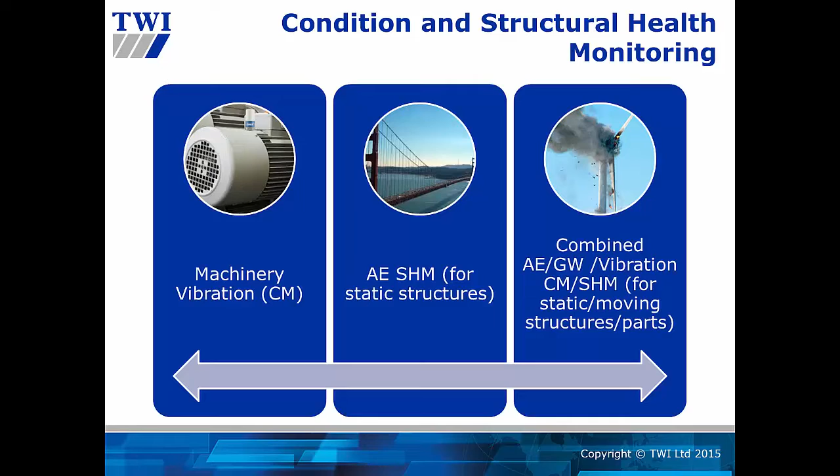CSM Advanced Technology Readiness through R&D projects covers the market needs and provides enabling technologies including hardware, software and cost-effective monitoring strategies.

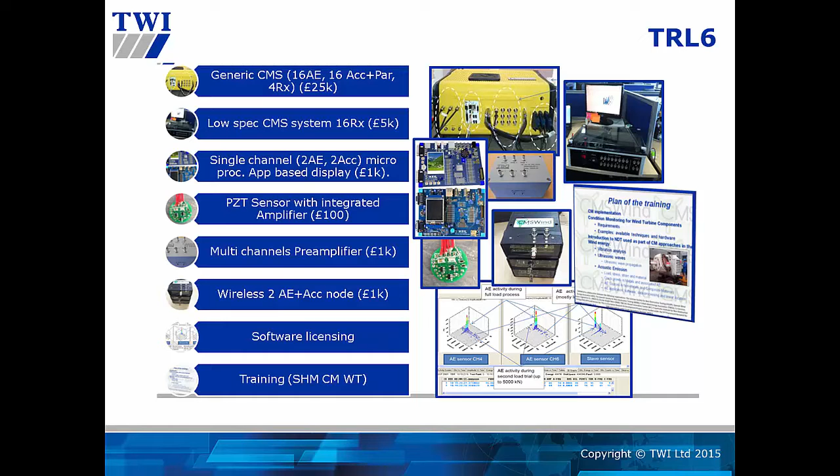Generic data acquisition systems, including wireless single channel designed for acoustic emission and vibration analysis, were developed. Consumables such as preamplifiers and sensors are also available. CSM can deliver bespoke systems and trainings for specific use based on the industry requirements.

As part of the CMS Wind project, CSM developed an advanced condition monitoring system for wind turbines based on vibration, acoustic emission and motor current signature analysis.

CMS Wind incorporated three different techniques simultaneously in order to fuse the process results and provide correct condition-based maintenance related information on the wind turbine machinery. The methodology was tested in a Vestas V90 wind turbine.

An automated baseline can be built out of the wind turbine operation, which makes it specific to the environment and operational conditions. The monitoring stage will then refer to this baseline in order to define the safe operation range. The entire process takes account of the wind and speed variability.

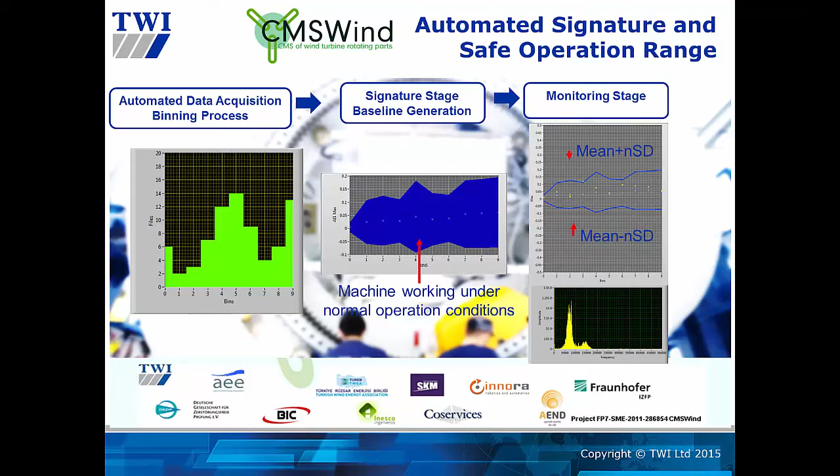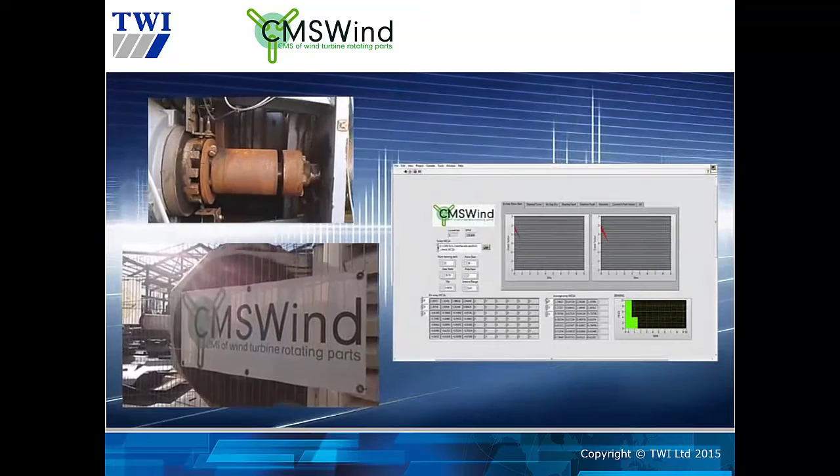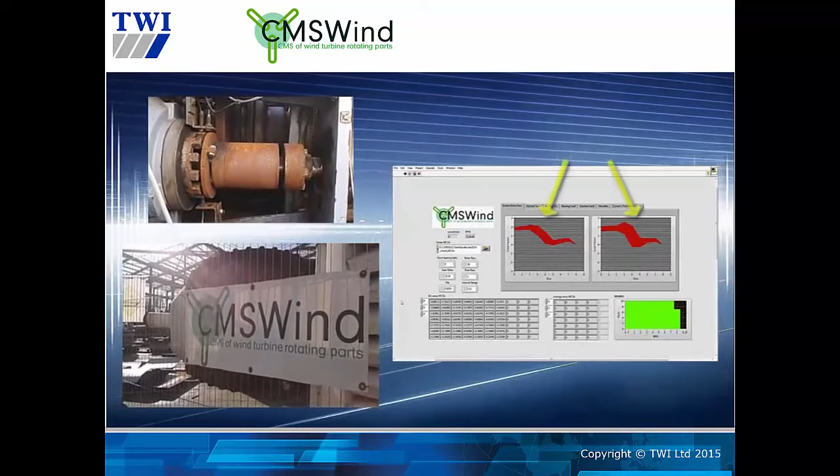Initial tests have taken place where the Windmaster 300 has been set up to run at different speeds, from 0 to 1500 RPM. Ten bins depending on the speed are defined, e.g. from 0 to 150 RPM, from 300 RPM to 450 RPM, etc., where gathered data is allocated per bin.

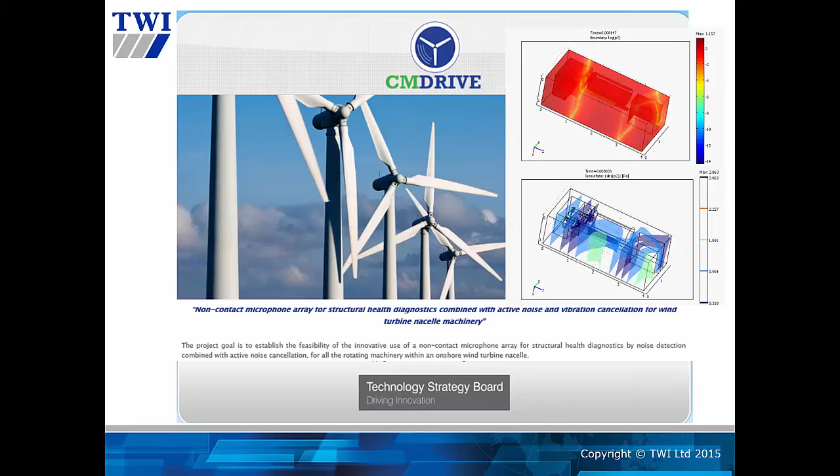The CM Drive project aims to establish the feasibility of the innovative use of non-contact microphone arrays for structural health diagnostics by detecting noise. The use of active noise and vibration control in order to cancel machinery noise has been investigated during this project. The CM Drive system relies on an array of non-intrusive microphones covering the audible frequency range.

The acquired data was able to inform about the acoustic signature of the healthy machinery. The noise levels change depending on the torque and the wind speed, hence the signature is defined by torque intervals. The binning procedure allows the identification of the acoustic signature with variable speed. It was proven that the system is sensitive to deviations from the healthy state of the machinery.

Within the same industrial sector, TWI developed a system and strategy for wind turbine blade monitoring. This can prevent catastrophic failure, such as blades falling from the wind turbine hub. The system is based on acoustic emission crack detection.

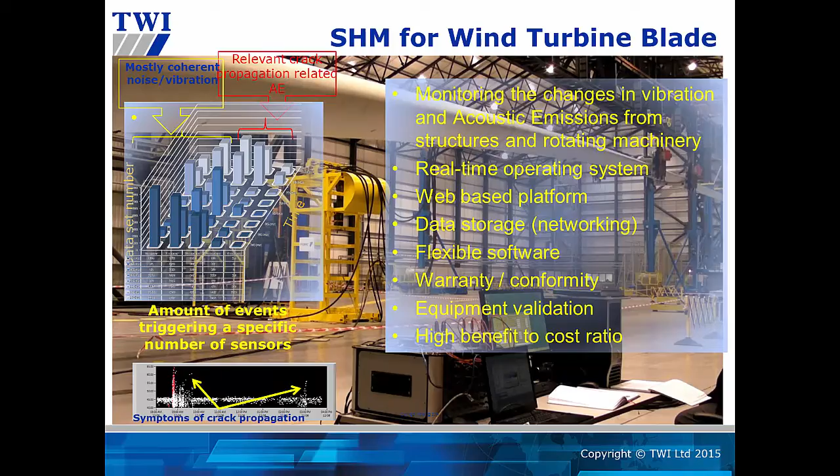It was validated on a blade fatigue test where initial cracking was embedded. A network of acoustic emission sensors was installed in a 45-metre long wind turbine blade in conjunction with a custom developed hardware and software platform for the data acquisition and remote health monitoring.

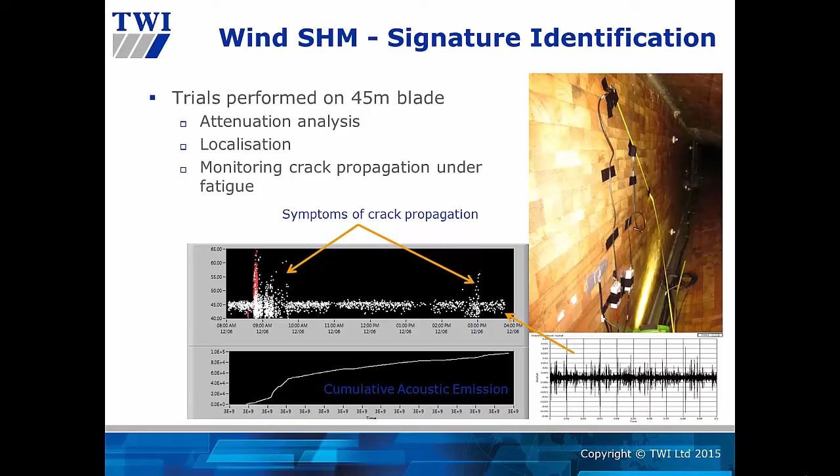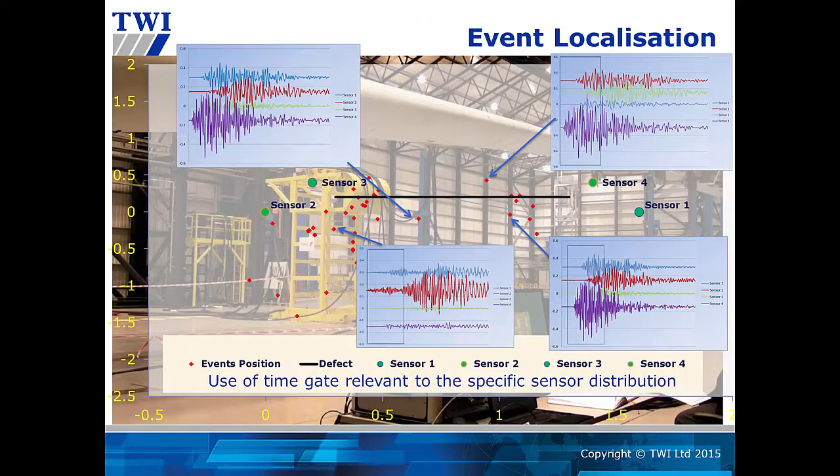The events representing acoustic emission from crack initiation and propagation became embedded in coherent noise. The investigation of the meaningful data related to the health monitoring represented a big challenge. The software strategy was successful in isolating the events needed and discriminating the unwanted events.

The DeICE-UT project aims to de-ice and prevent wind turbine blade icing during operation for wind farms located at extreme weather conditions, in order to improve operational conditions, efficiency in power generation and safety.

In order to achieve the objectives, a methodology including low-frequency vibrations and guided waves was developed. The system can identify the modes and operate at specific frequency in order to break the cohesion between the blade surface and the ice layer.

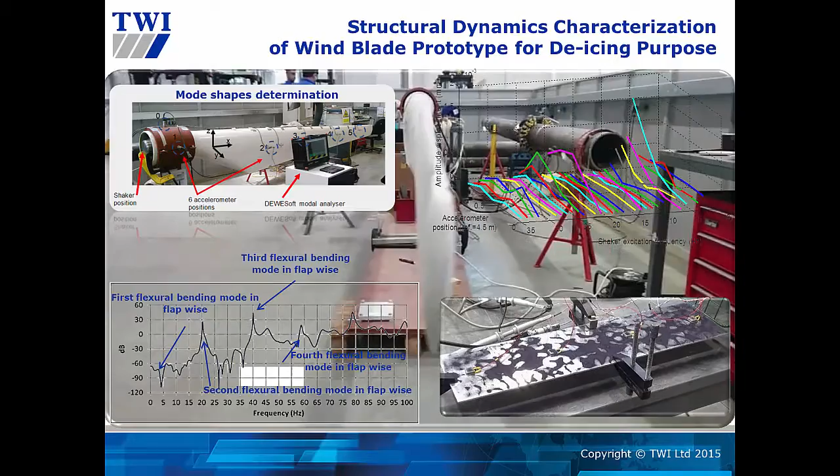Low-frequency ultrasonics was introduced as an anti-icing methodology, which can prevent ice formation on the leading edge of the wind turbine blade, which is the most critical area for the efficiency of power generation.

REMO is a project which aims to enhance the performance of tidal stream generators.

The aim of this programme is to advance technology allowing for condition monitoring of tidal generators. The REMO system is composed of 3 slots for data acquisition.

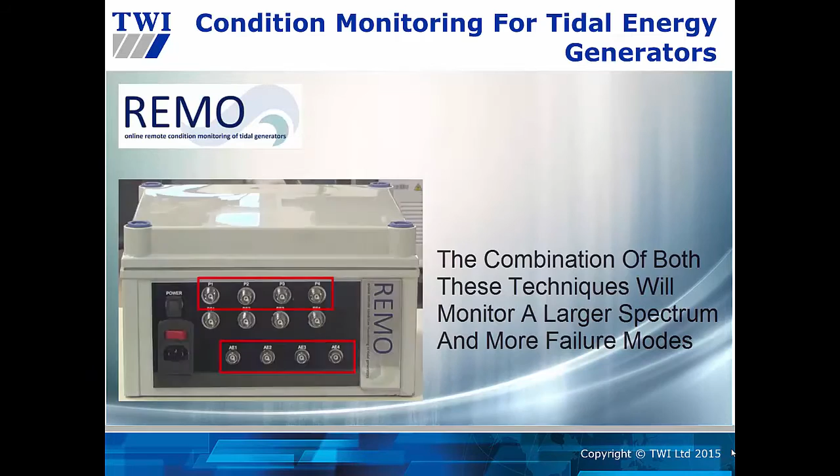The system has the capability of remotely and permanently monitoring the entire frequency spectrum of structural vibrations generated by all rotating components of a tidal stream turbine by combining a suite of accelerometer and acoustic emission sensors for the low and high frequency regime respectively.

The software continuously stores and analyses data while graphically displaying useful information for the operator. The data is transmitted wirelessly from the REMO system to the tablet for storage and analysis.

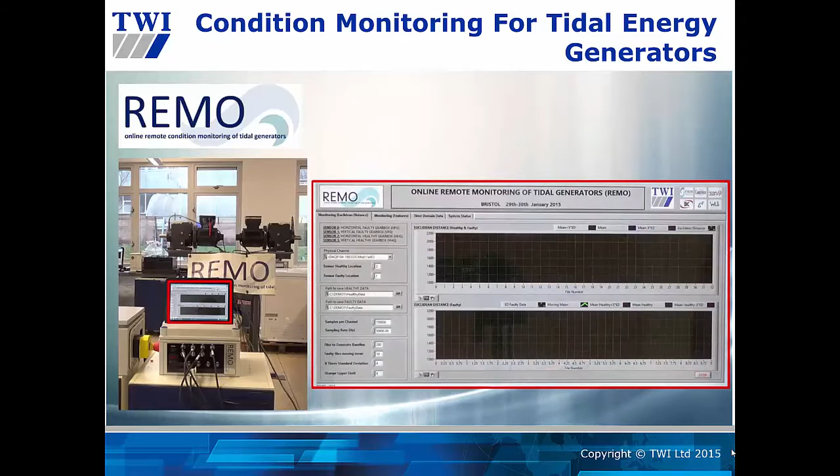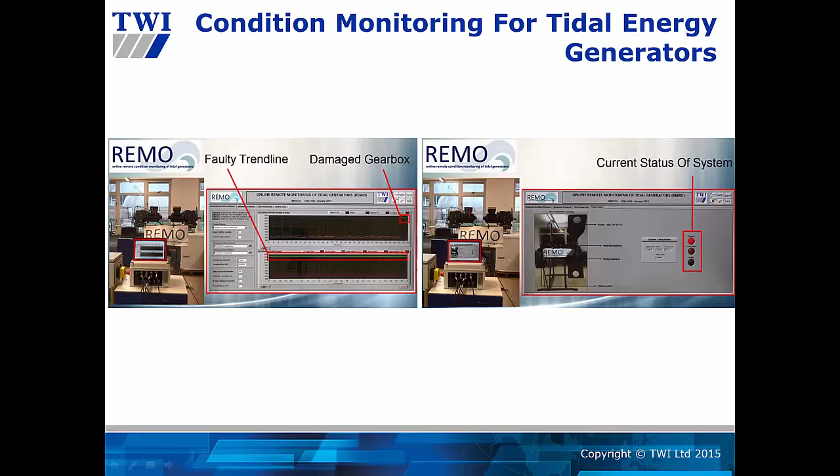Advanced signal processing algorithms have been implemented in the software in order to identify the machinery status. The system can be accessed remotely and the operator can identify advanced warnings. A set of short and long-time laboratory experiments were performed in order to validate the algorithms.

PIGWaves project, funded by the 7th Framework Programme, addressed the need to develop an internal inspection tool for in-service inspection of unpiggable pipelines using long-range ultrasonics.

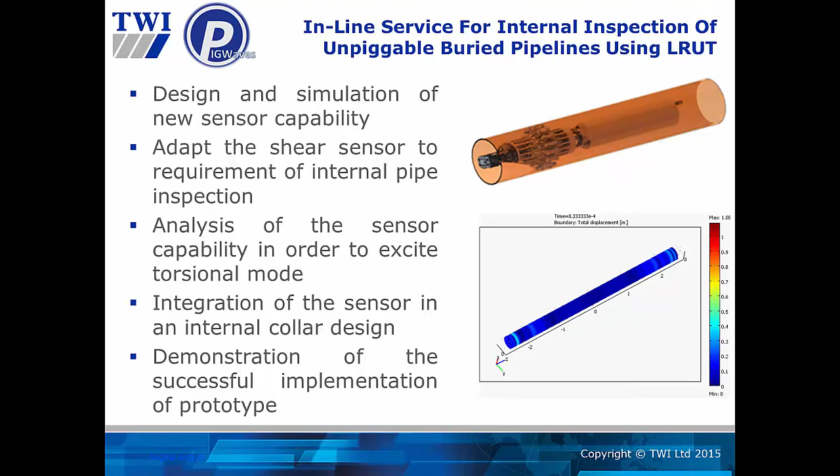Experimentation and advanced full design simulation of a uniform in-plane transducer and guided waves propagation was developed. Sensor design was performed analysing different strategies since the excitation was applied to piezoelectric material in different manners. Excitation along the width with higher level of displacement amplitude was obtained.

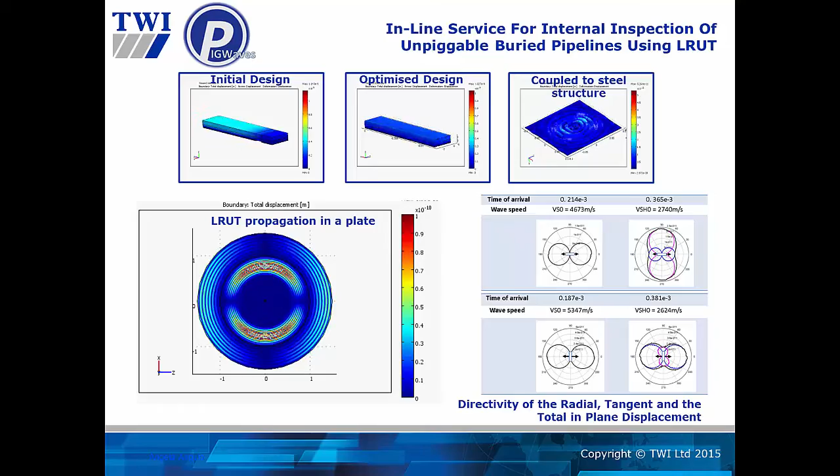An expandable internal array of long-range ultrasonic probes have been developed. Corrosion defects with thinning greater than 10% of wall thickness are detected.

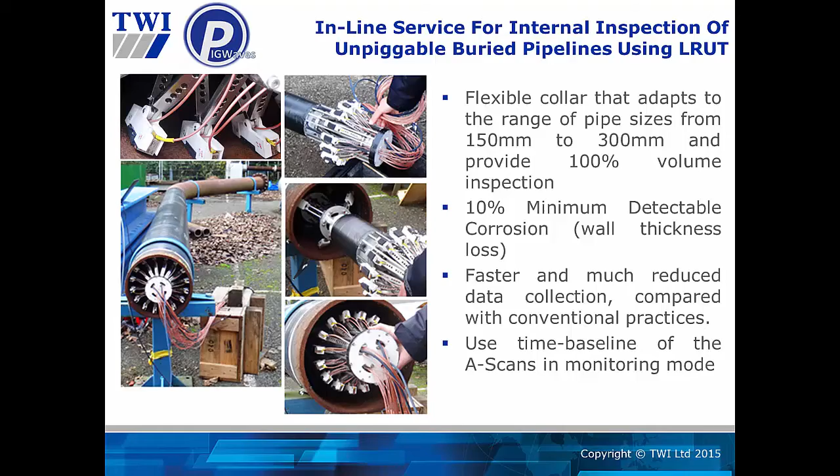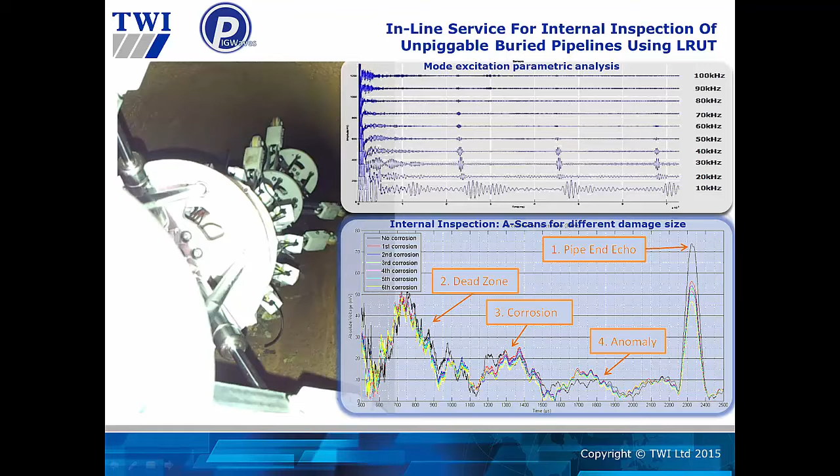PIGWaves reduce data storage time with greater inspection speed and quicker availability of the inspection results after the robot is recovered. Indication of different types of damage due to changes in received signal amplitude of the A scans compared to the time baseline is key in the data analysis.

SubCTest is demonstrating the use of remotely operated vehicles in the assessment of subsea structures by deploying inspection and monitoring techniques such as ultrasonic guided waves and alternating current field measurement. The project aims to build an exploitation strategy in the oil platform sector with a complete market analysis.

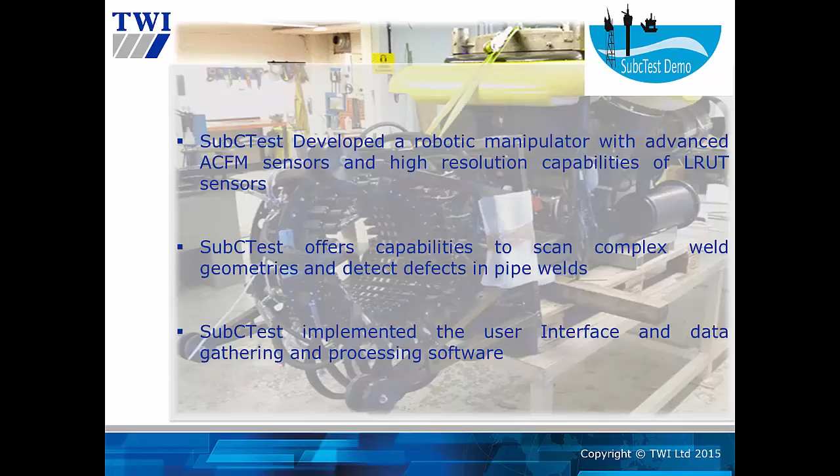The Subsea Inspection Collar can deploy LRUT and EMAT sensors. LRUT can locate the position of defect, such as corrosion, whereas the EMAT can characterise cracks.

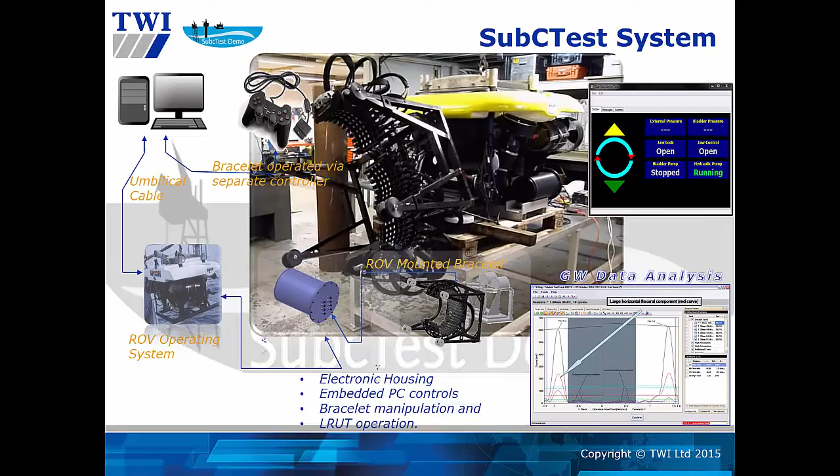CSM has supported the SOIMON Consortium through the implementation of enabling technology that helps assess the impact of oil and gas activities on the environment.

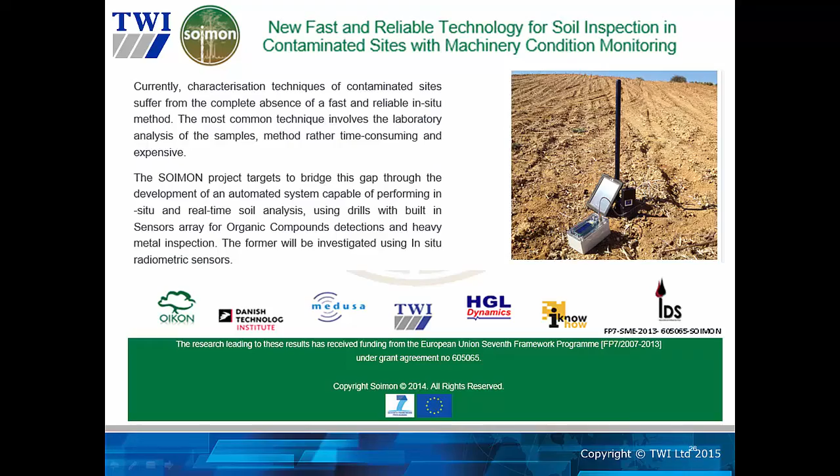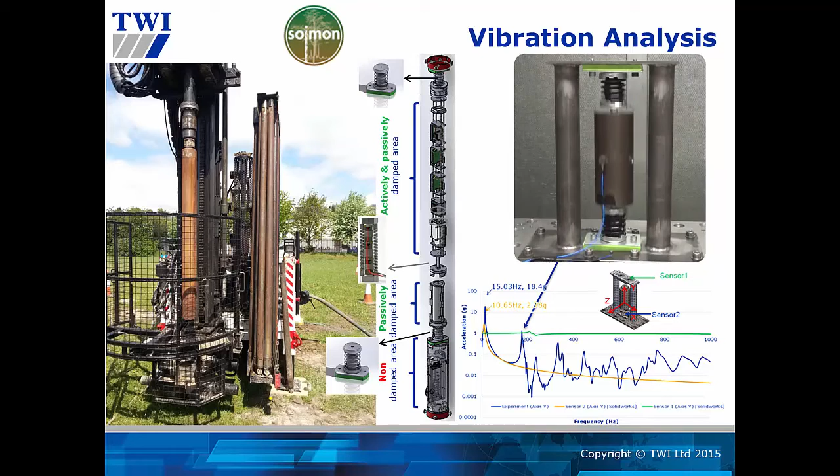SOIMON is incorporated into sonic drilling bore pipes and offers hardware and sensor capabilities. It can assess soil contamination whilst drilling. Furthermore, SOIMON can offer structural health monitoring of the drilling equipment using vibration analysis and acoustic emission.

CSM evaluated the use of active vibration in order to cancel excessive vibration occurring inside the bore pipe system, which could harm the embedded sensors and electronics.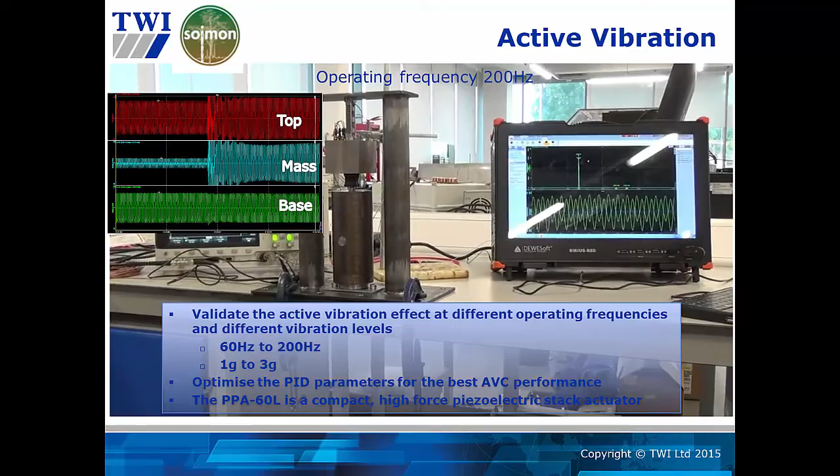A piezoelectric actuator was demonstrated to actively damp some of the high amplitude levels by optimizing PID parameters to specific circumstances.

The Soimon system was included in the bore pipes and successfully tested in the field.

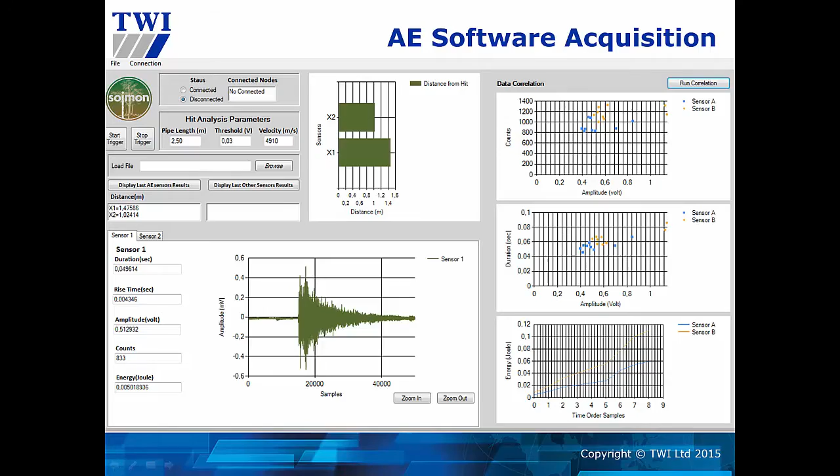Whilst drilling is in operation, the Soimon system offers a SHM capability using acoustic emission which is able to identify the bore pipe damage in real time, avoiding major structural damage that could deteriorate the entire system.

CSM investigated the use of acoustic emission for the monitoring of hydrogen embrittlement in dissimilar joints. The acoustic emission cumulative hits show the progress of the cracking activity in the pipe.

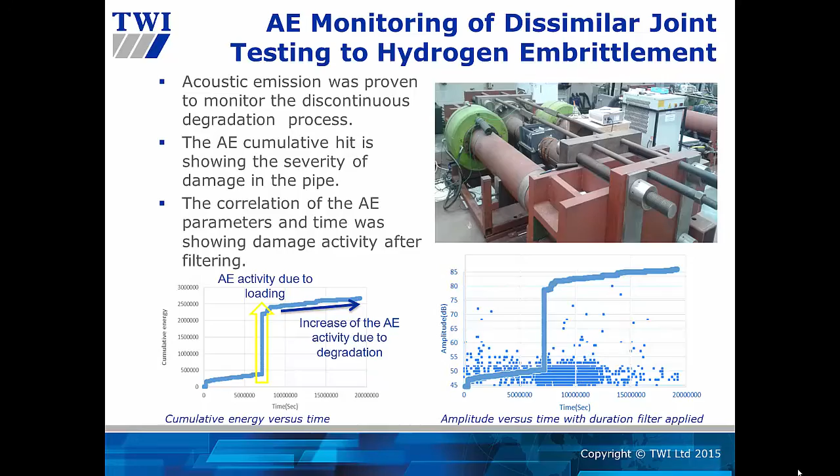CSM incorporated vibration analysis with risk analysis in order to automate the risk evaluation using remote monitoring. This was applied to the process piping systems.

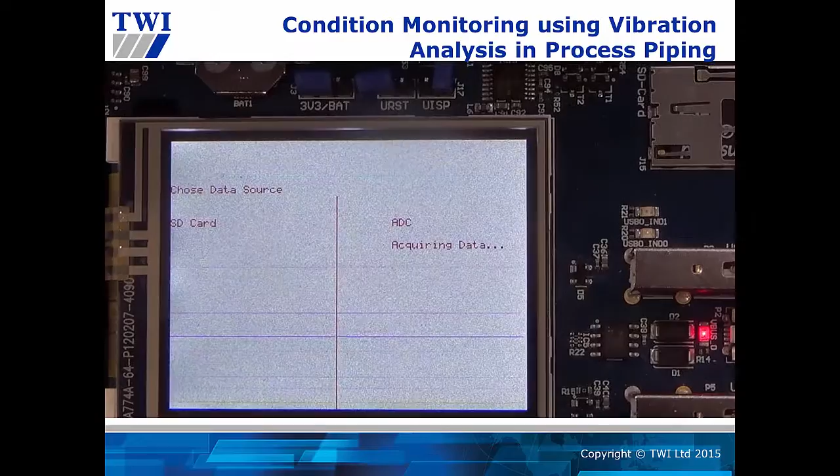These components have traditionally been designed on the basis of static analysis, which left them prone to fatigue-induced cracking. The system can update the risk based on the guidelines for the avoidance of vibration-induced fatigue and standards being used by the operators.

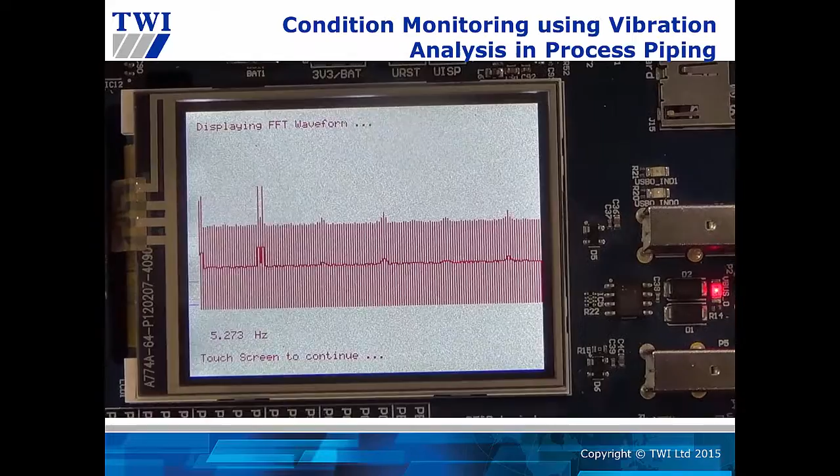Acoustic emission has been deployed as a monitoring technique on a resonance fatigue pipe in order to detect crack initiation and propagation at the girth weld prior to the pipe failure.

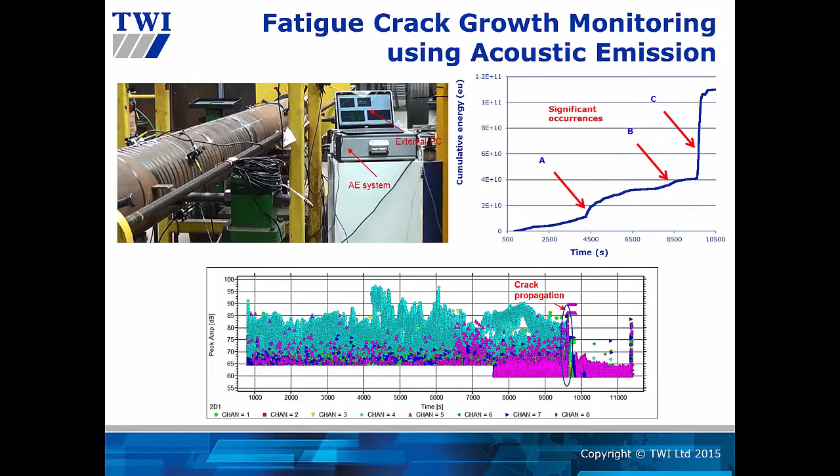Acoustic emission appears to have the ability to predict initiation and potential propagation events.